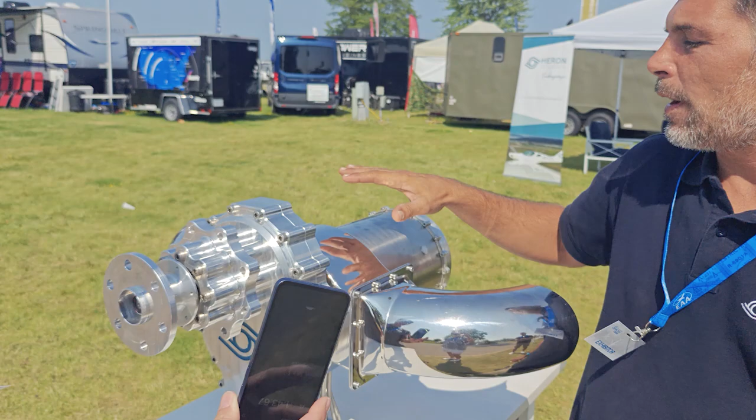So we have a twin fuel system for redundancy. It is vetted and working mostly with Jet A or the heavy fuels like kerosene or diesel, if you will. In the case of the hybridization, because it is a free turbine, it can handle the loads very easily, because the gas generator reacts accordingly to the load. So if you load it with a big load, it can handle it, and you see just some change in temperature.

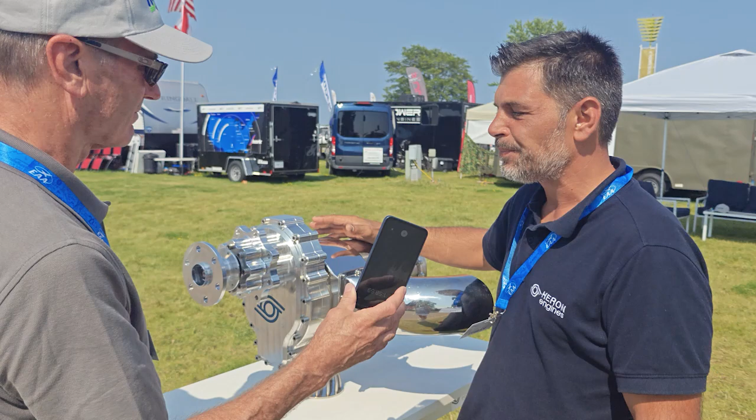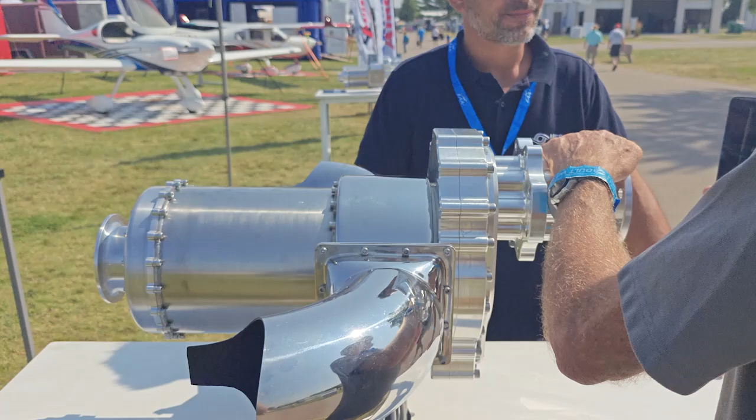The gas generator rotates about 75,000 RPM, and then we have the free turbine and the reduction gearbox here where we have the output shaft. Right, and now we can take this output side and reduce it, which is better for our prop speeds. And with our electric motor mounted with all these mounting points and our cog belt system that goes around the electric motor, tie that into the ECU, where we can then double the power for climbing to altitude with only a small battery, because then we'll turn off the electric motor.

The gas engine is up in cold air, which it really loves, and it's at its peak horsepower then at altitude, and it's recharging. We have a service ceiling of 28,000 feet. Yes, 28,000 feet, and the electric motor doesn't have a service ceiling. It doesn't care, but then it turns off and turns into a generator and recharges that small battery pack, which then provides a stealth mode option at a later time in the flight.

So how many of these are in production now and in testing? At this moment, we have 4 pre-production engines that we are flying with our airplanes, and we are setting up the production at this moment. So that's perfect for our program, because we're both starting out, and this is already not only a working model, but a flying model. So we're in a phase 2. This could be easily installed in one of our test bed aircraft and prove all the parameters. It is a huge benefit.

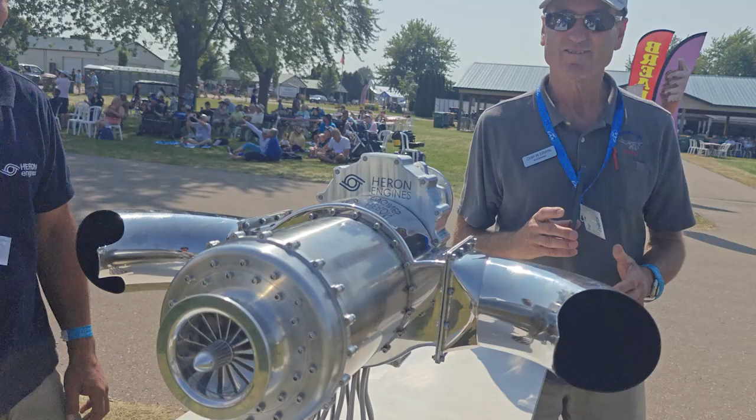Chip Erwin, Aeromarine, at the Hybrid Pavilion, where we're displaying the Redline turbine and some of the other hybrid technology that we're developing under this Phase 1 SBIR, and we're also, parallel with the SBIR, commercializing these and developing these in real time, real working models, and showing it at the biggest air

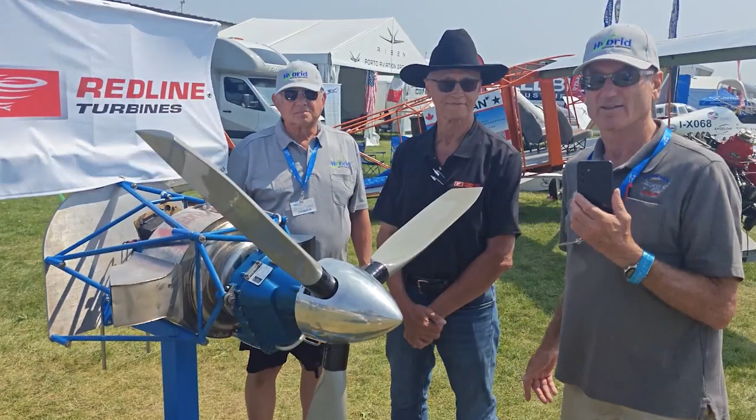show in the world. And we'll show you the whole booth shortly, but let's get right into it with Brian from Redline and Ben Bosma from Aeromarine and Parallel and Hybrid Aerospace, our technology partners. So here we go with the Redline turbine. My name is Brian Seegers. I'm a partner at Redline, and we're here working with Hybrid Aerospace and Aeromarine.

We have a 100 horsepower recuperated free turbine turboprop. We call it a miniature version of the PT6, and it was developed originally for drones. And what we have here is basically the complete engine from prop flange to the inlet. The entire weight of this engine with accessories, perhaps 75 pounds. This one is currently fitted with an electric controllable pitch propeller.

However, one of the reasons we're here on display is we're working with Ben at Hybrid Aerospace and Aeromarine to adapt a perhaps 90 to 100 horsepower hybrid system, similar to what is being tested on the recip engines. Would you like to chime in here?

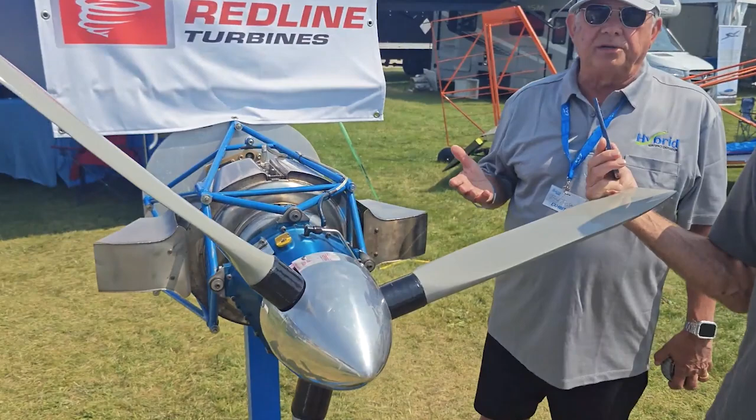Yeah, I'm Ben Bosma from Hybrid Aerospace, and what we're doing here is we're exploiting and finally getting to use several patents that are part of Hybrid Aerospace to develop a parallel hybrid engine, which is unlike anything else here. Typically people will call a hybrid something where they attach a generator to a motor. That's not a true hybrid.

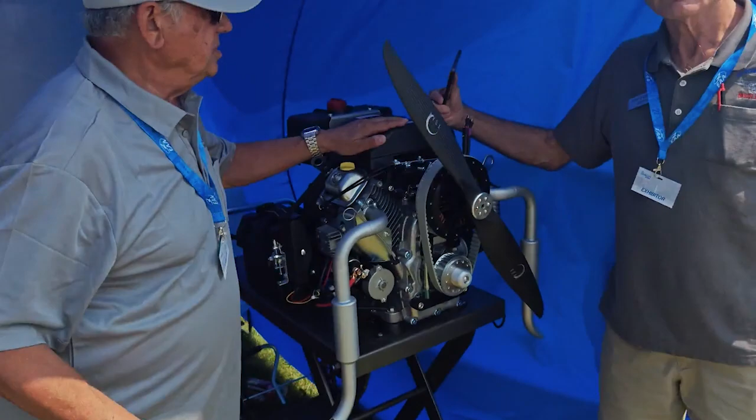So our parallel hybrid technology is identical to what you would see in the automotive industry, the Prius, for example, or the Ford hybrid. I have an example of how that works over here, which would simplify it. So this engine right here is a very easy to purchase Harbor Freight Predator 670cc engine. It produces about 22 horsepower.

And available off the shelf for $950 with a free flashlight. $50 off on Father's Day.

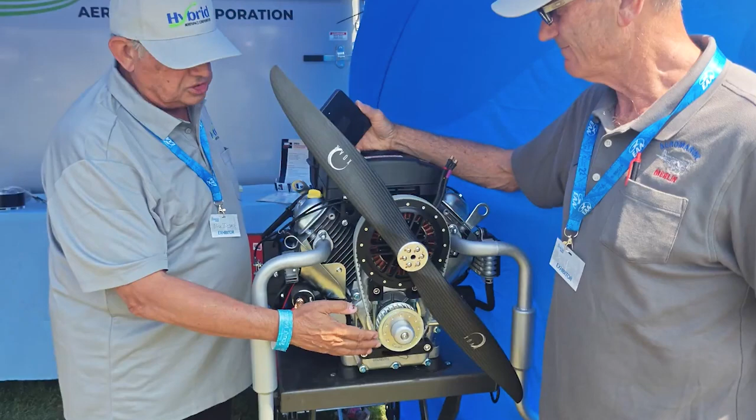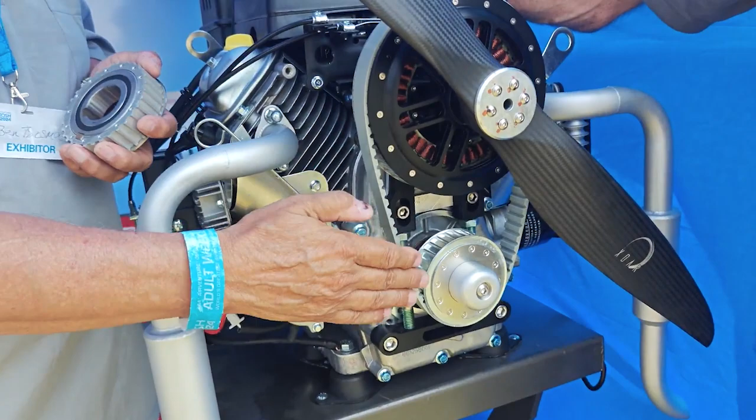That's right. So what's different about it is we have a redrive, which is a reduction drive that reduces the output RPM to a more reasonable RPM for swinging a propeller. I don't have it tightened up right now, but down here is what's called a sprag clutch, sometimes called an overrunning clutch, and I've got one here that I've opened up. What it does is it turns freely in one direction, but it locks in the other. There's no ratcheting, and it fits right here.

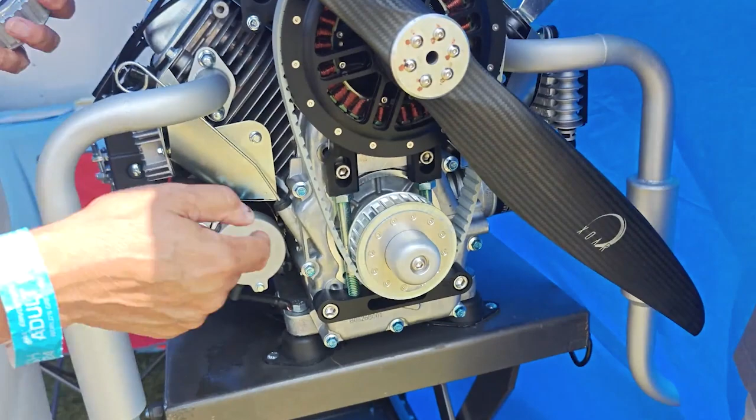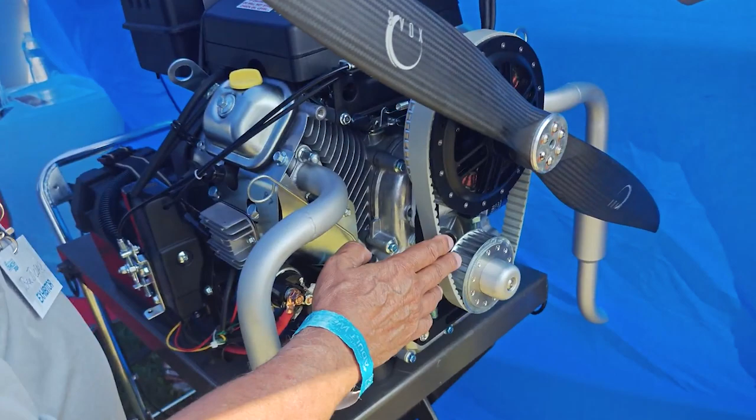So as this engine turns in this direction, it grabs the clutch, but if you go in the other direction, as if I have the power coming from the other side, it freewheels. This allows the motor to power the propeller instead of the engine. However, because of this arrangement, we can actually do both. So if we had to, we could combine the output power of the engine with the output power of the motor to, in this case, double the power of the entire system.

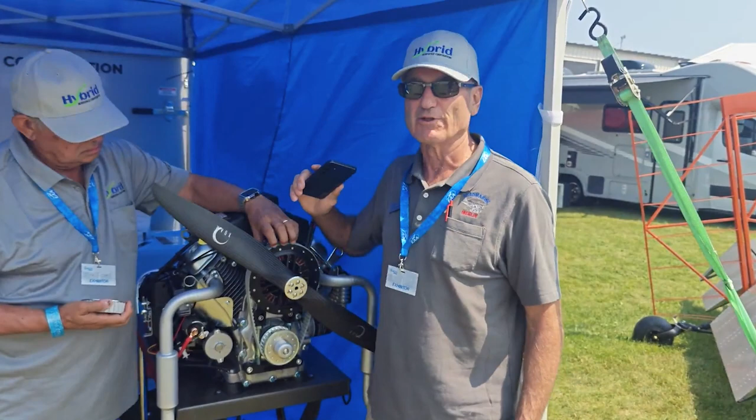We're doing the same thing with the Redline turbine. We will have a motor connected to the output shaft of the turbine, and the two will combine, or the motor will be able to power it separately, or the turbine. Well, Ben, if I may, this is a 3-month Phase 1, which normally is just a feasibility study, but we've actually finished this, and both the motor and the engine have been running.

And when we get back from the show, we will finish the integration of both of them, where we can use this test bed and use a scale to measure the thrust of the electric motor, measure the thrust of the gas motor, and then measure the thrust combined with both of them operating. And then that will be our first truly functional finished parallel hybrid.

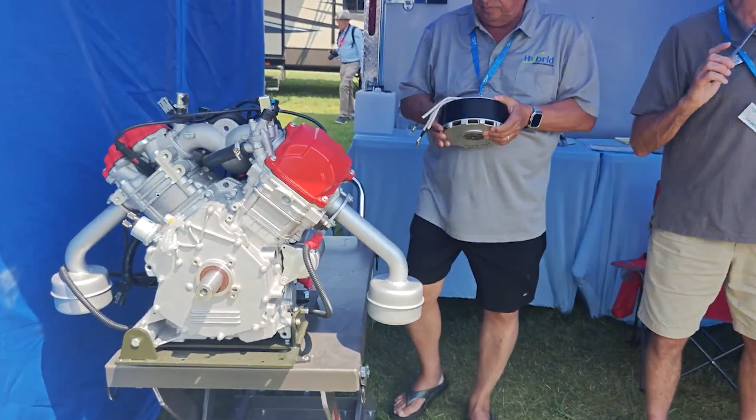But as you can see, moving forward, and you can see a couple other engines here, motors, we can choose nearly any gas engine and match it with equivalent power in kilowatts of the electric motor. And then we just mill these rings that fit on. There's other parts that aren't here, but you get the idea of how that would attach.

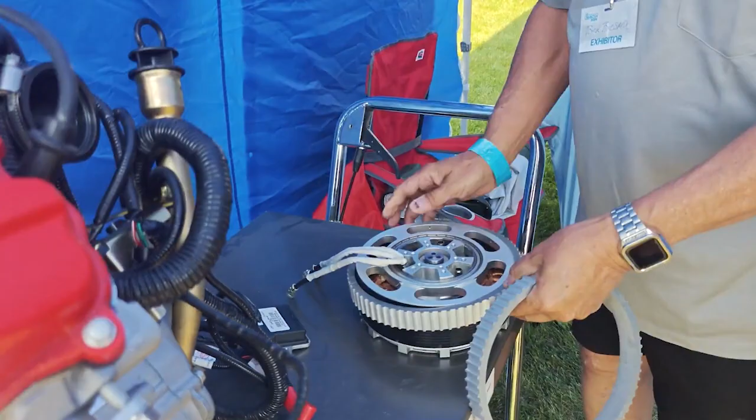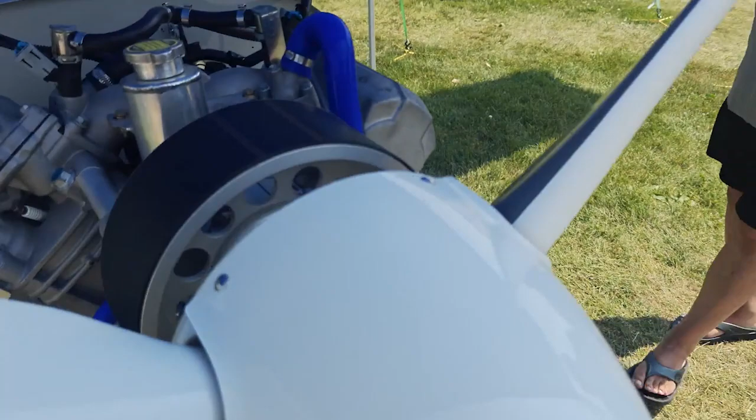So the next size up is the 60 horsepower V-twin, which we use on the Merlin light sport class aircraft, and we have that on display. That's a brand new aircraft, and maybe take a quick shot of that. That's the hybrid Merlin that will be flying first with the normal reduction drive, and then after getting the benchmark data, we will convert that top pulley and remove that and insert the hybrid system, and then fly it on gas, and then fly it also on electric, and then fly it combined.

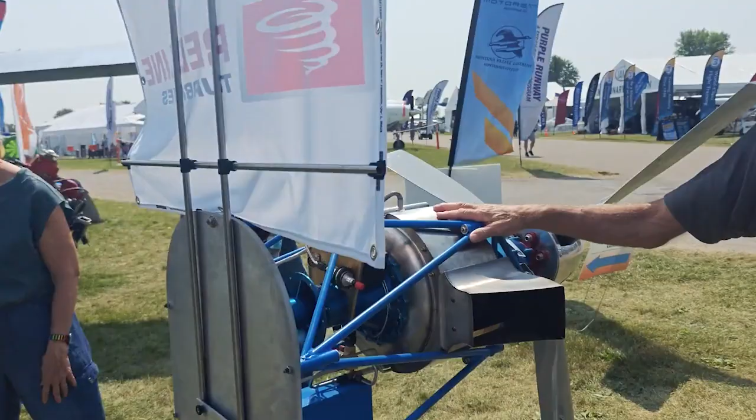But first bench test, and then we have the platform already finished, so we'll be flying the first parallel hybrid this year. Now, the next scaling up is what this can do. And you can see the different size, the different kilowatt motors that can go onto this. So we're circling back now to Brian, where he'll describe how to integrate the electric motor here. Okay.

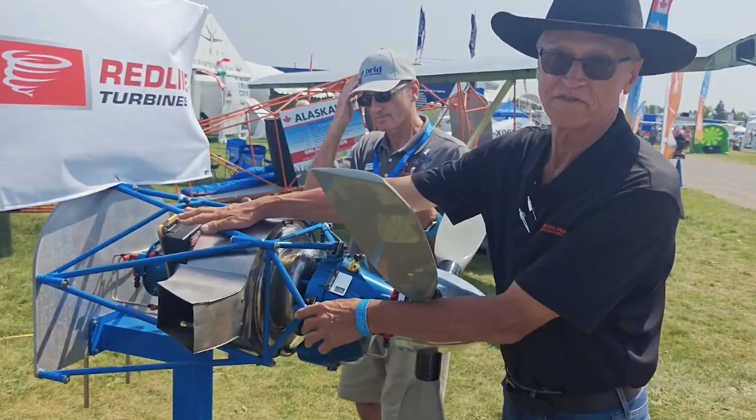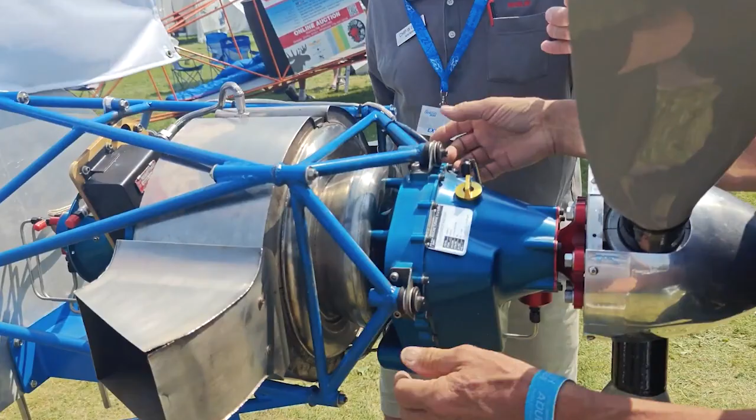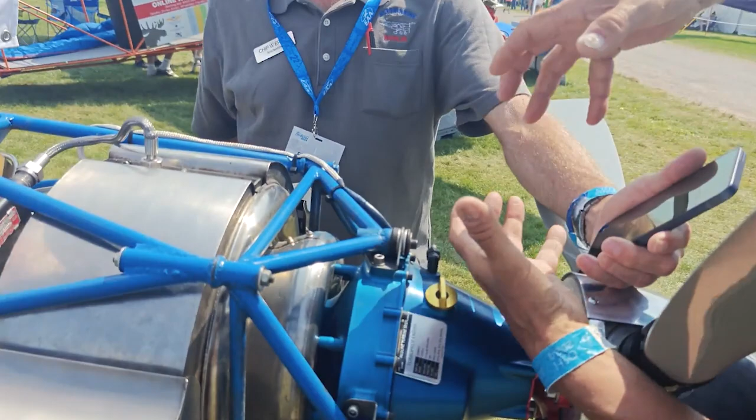This engine mount is divided into two sections. And this one carries the loads past the recuperator heat exchanger. This truss right here can be modified to tie the engine mounts into this structure and then also into a structure that will mount the motor above the gearbox about here. We'll take the isolators off here and put them on the actual mounts that hold the motor gearbox and the propeller, which now has been raised up to here.

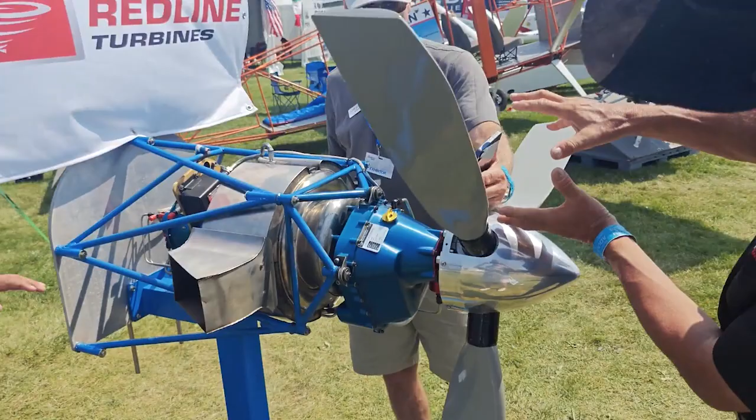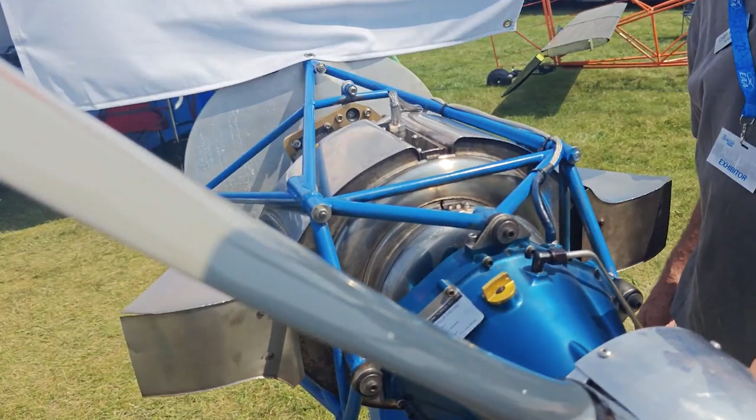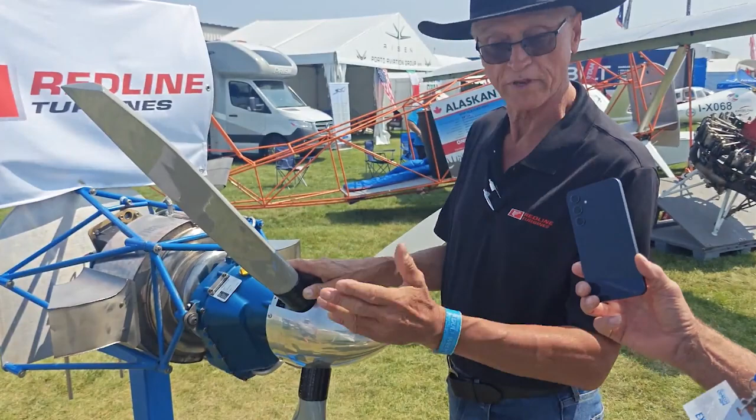Just like with the reciprocating engines, we can operate with the motor engaged, perhaps 180 horsepower for takeoff, and then turn the motor off and use it to charge batteries during cruise. Also, another benefit of having the thrust line moved up with a structure here and a gear, we'll say a reduction drive, we now have an opportunity for a through hole so that we can run a standard hydraulically operated constant speed propeller. So we can basically run a constant speed propeller at a lower speed than this propeller operates at, perhaps in the sweet range, 2300 to 2600 RPM for low noise, and be able to use an off-the-shelf propeller governor and pitch control.

Well, we keep finding further benefits of this. One of them, by moving the power output higher, we gain more ground clearance of the propeller. By gaining more ground clearance, we can put bigger blades on and more blades and longer blades, which is not only more efficient, but we need that, especially the adjustable pitch, to soak up all that horsepower that we're now putting on with two power systems. And another benefit, and maybe you should talk about this, Brian, is that turbines love cold air.

But they're not so great when you have hot air on the ground and you want to get to altitude. And what we're doing, the main premise, or one of them with the parallel hybrid, is we're not carrying thousands of pounds of batteries. We're only carrying a minimum amount of batteries to assist in getting up in the air. But having that extra power to supplement the turbine means that we can get this turbine up to colder air where it can run more efficiently, and that'll be a major benefit in range extension. Yes. Was that clear enough?

That was clear, and maybe an additional benefit you might want to mention is that batteries don't care about density altitude. Perhaps there is degradation in propeller performance, but we do not have the degradation in, we'll call it engine performance, because electricity doesn't care what altitude it's at. So you'll have the full power available from the electric motor, whether you're flying sea level or out of Denver, Colorado.

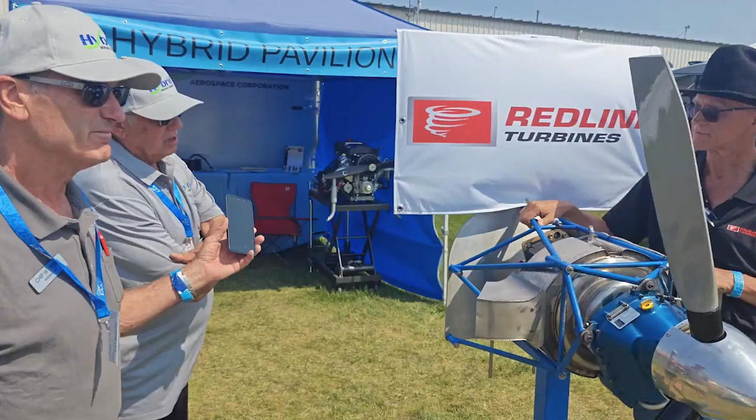What is the specific fuel consumption of this engine, and how does that compare to a reciprocating engine or other gas turbine engines, Brian? I'll start by saying small turbines are typically less efficient than piston engines. Now, this engine is different from many of the other turbines you see. It incorporates a heat exchanger here that takes heat from the exhaust and returns it to the air downstream of the compressor. And this thing is responsible for 15 or more % reduction in fuel flow.

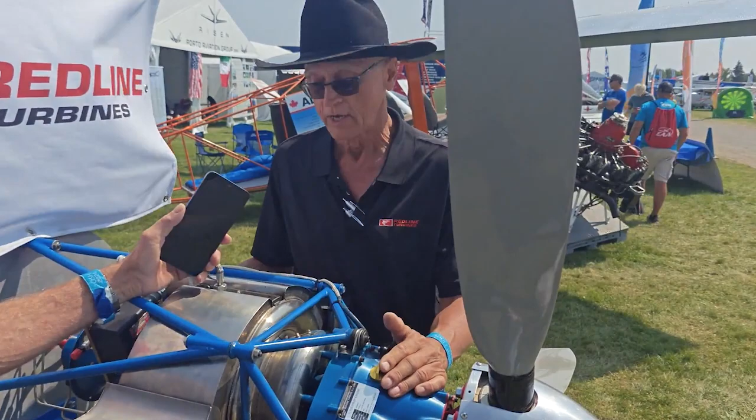Yes, and I'll even throw in another benefit. When you parallel hybrid something like this, you're giving yourself the extra power that you need to take off out of a short strip or some crazy runway someplace. When you get up to cruise, you're cruising now with a smaller gas turbine than you normally would have needed if you had to have that power solely from the turbine. So you're going to be running a smaller gas turbine at a higher power level, and when a gas turbine runs at a higher power level, it gets better fuel efficiency.

I'd like to continue a quick tour because on these programs, commercialization is quite a big factor. And I'd like to point out that we've been at this show here now 44 years, and we're in the center, air show center, prime real estate in the general aviation section, and we've got basically the equivalent of 3 booths. So we're just gonna walk down here and have a quick panoramic of, we've got this hybrid Merlin.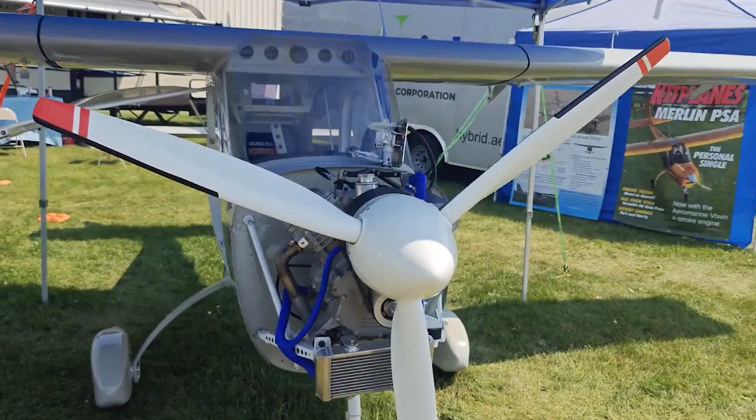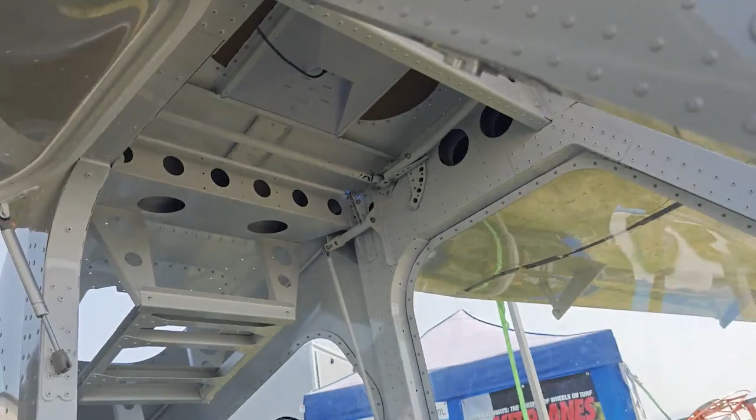And I need to point out something special about this. It'll be ready to fly in just about 2 weeks, but it's the first Starlink enabled light aircraft. And we've 3D printed a mount, and you can see that on the top, or you can see it from the bottom. I'm not sure, can you see that? So this is an active Wi-Fi now. It's really a truly mobile hotspot, and we've been using it all week for our phones and tablets.

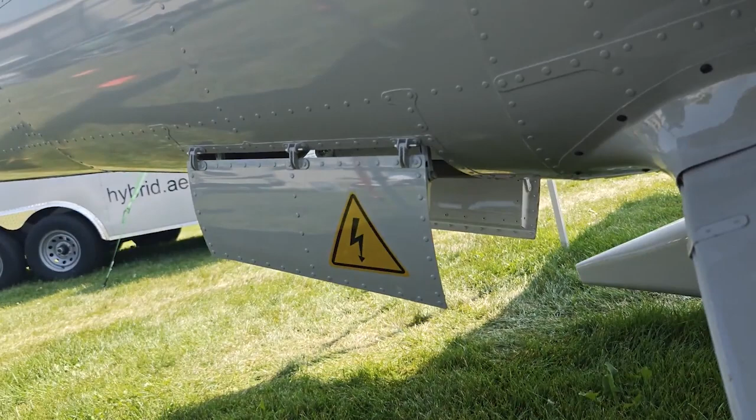But we have another feature on this aircraft, because this will be hybrid, and if you show this, which everybody refers to as bomb bay doors, because that's kind of what they are, that allows us to load and unload the battery packs. Remember, hybrid is only using the battery a little bit, like 5-10 minutes. So we're not carrying hundreds of pounds, we're carrying like 20-30 pounds, easy to load, easy to unload, and in case there's an incident, easy to eject. So we can offload the batteries should there be a catastrophic failure of the batteries and they're gone.

There's another benefit that maybe you might mention there, Ben, of what else we can load in there? Yeah, if we had to load supplies or some sort of a kinetic effect payload, we could do that easily using this system. Another thing about this particular aircraft is that it's set up to be a drone. By that I mean it can fly autonomously. It has all of the servos and all of the electronics to be able to fly on its own.

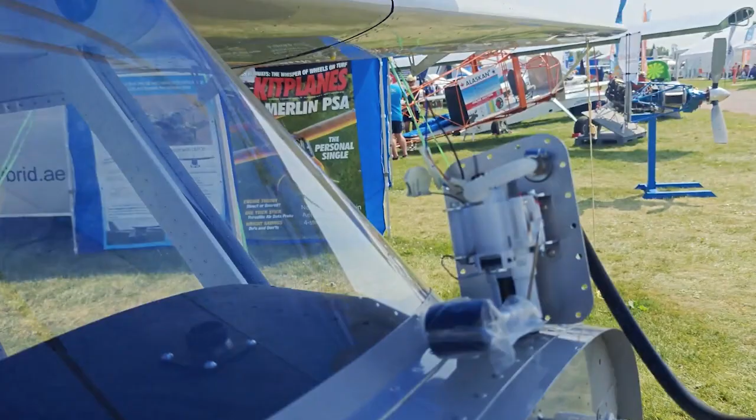One of the key features that we designed into this aircraft is the fuel system. In most light aircraft, the fuel is distributed in more than one tank. So with this one we're no exception. We have tanks in either wing, but the way that we manage the fuel is through an all-automatic fuel system that allows us to draw fuel either from the left, right, both, but in addition to that, we can take the fuel and deliver it on a timer or a balance system.

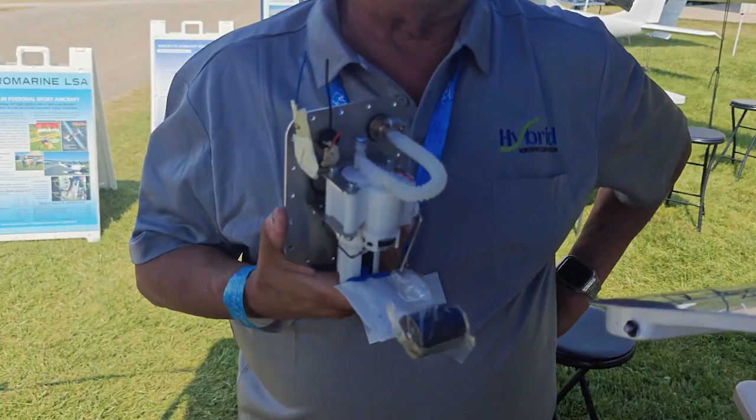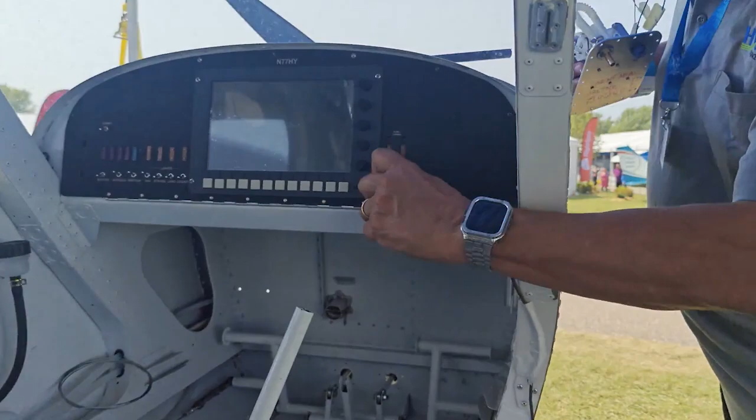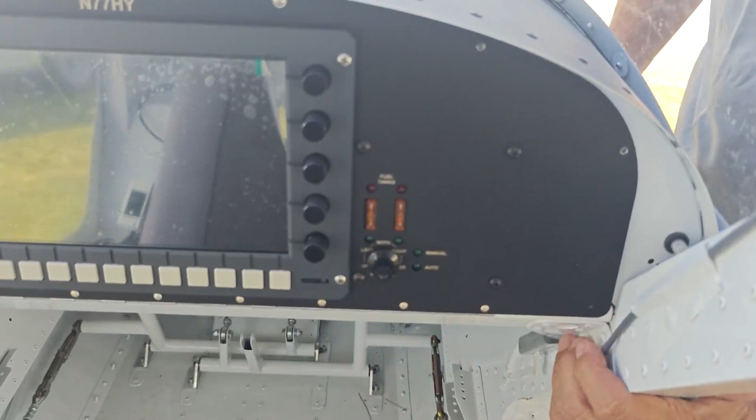If you look in the cockpit here, let me get in the way here. We have a fuel management system that in this position is in the off position. Then we have left, right, both, and then we have timer, which means that the fuel will go between tanks left and right every 5 minutes, and balance. That system there is on a PIC type of controller, all burned into hardware to allow this to function. The lights tell us which tank is feeding, and these two lights tell us whether we're in manual mode or automatic mode.

This entire cockpit, when manned, is a full electronic flight instrument system. It has synthetic vision. All of the radios, all of the navigation radios, GPS included, are there. Now, another feature of this is that because we have Wi-Fi streaming in and out, we can access this aircraft remotely using VPN. In other words, we can take this screen and bring it to our ground control station, not with a separate ground control station, but with a browser. So we'll be able to make a Zoom call to this particular aircraft and fly it that way.

VPN is actually the way we're going to do it, but that means that this thing has a dedicated IP address which we can access. And I'm thinking that this may be the first and only aircraft that will be able to be managed, controlled, and flown using Starlink.

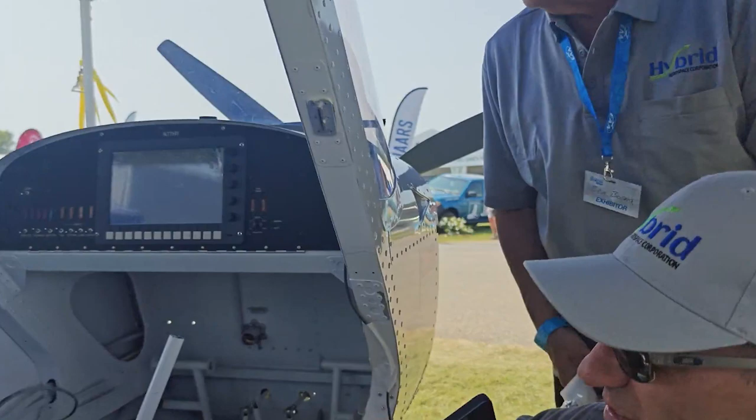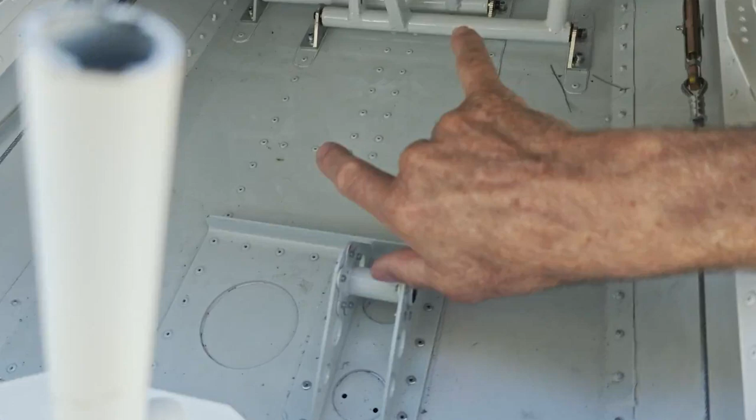Right, and that benefit in GPS denied theater. I'd like to mention, if you show here, we've already installed or prepared the mounts on 7 different servos. So this servo here, and I'll show you the servo if you bring the servo over, is the steering, because it's a steerable nose wheel. So not only does it steer the nose wheel on the ground, but it has the rudder for one axis

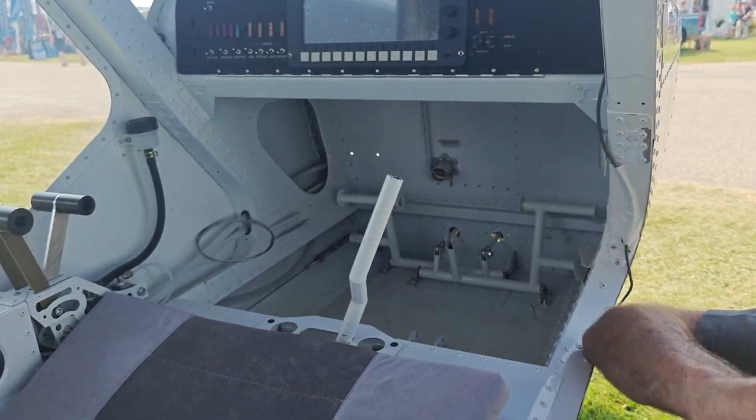of the flight. Now in the back, you won't be able to see them, but there's 2 conventional servos for pitch and roll that are normal for a 2-axis autopilot. And then we have a brake servo and a throttle servo. The throttle servo might be simplified with this electronic throttle, because this has a mechanical switch on the fuel board, but it's a microprocessor behind, so that can easily be controlled simply with a signal.

And then there's another servo for the flap. So we have a 0 to 40 degrees with a 5-position flap up there. And this aircraft has a rocket propelled parachute. So we have a parachute that will bring the whole craft down. It opens up in under 3 seconds and floats the whole craft down. And there's a servo to enable the parachute.

And of course, then there's the bomb bay doors, which can deliver humanitarian aid, blood canisters, type-specific blood, drop off batteries, drop off other payloads, or kinetic devices. And that's on a servo as well to open and close those doors.

Now there's a variation that we have in design, because it's quite simple to increase our range because the fuel tanks are in the wing. We can triple the amount of fuel and simply add a fuel pump in each tank, and it's just simply a matter of selecting which fuel pump to turn on, and that's all you have to do for fuel management. It's very simplified, and we can do 4 times the range, and we already have 500 miles range on this.

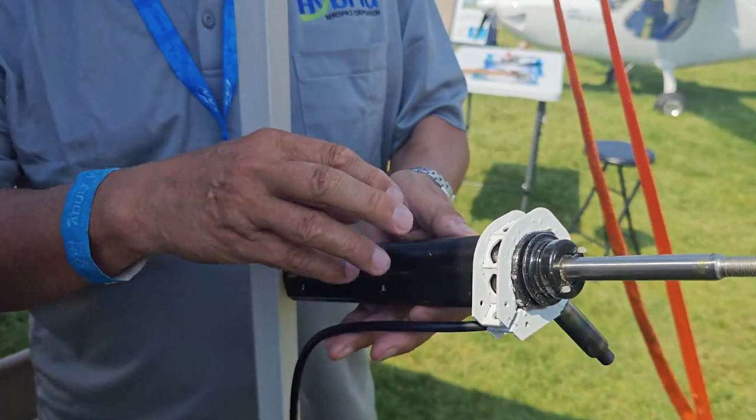I'd like to talk a little bit about the type of servo that we're using. So in a lot of aircraft that are both optionally piloted and autonomous, the servos are difficult to disconnect. So in a lot of cases, that's a problem. This particular servo is a linear actuator, but as you can see, the actual actuator free floats. The reason it free floats is because there's a split nut on the inside that grips the Acme screw to actuate it. So when we energize this servo, that's when it becomes a servo. Otherwise, it's just free floating.

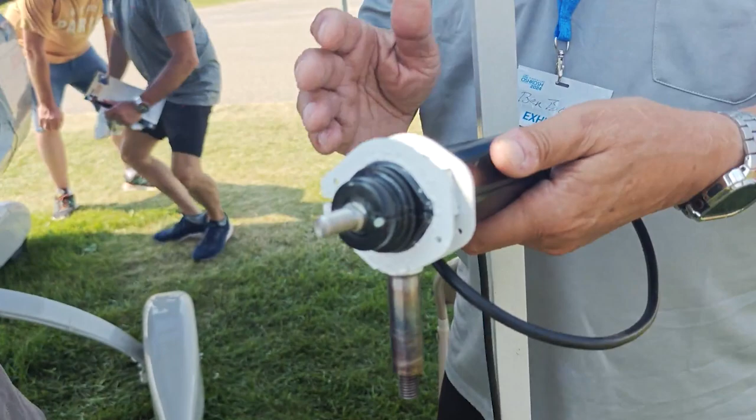It also has what's called an LVDT in here, linear variable differential transformer, to give us the position. In this case, we're using this one for the rudder and for the nose wheel steering. We will know where the nose wheel steering is, whether a pilot is actuating the nose wheel steering or whether the software is.

So there's also an electric trim tab on here, but basically the key point of what Ben was saying was when there's a pilot on board, all axes are free. The pilot can control the aircraft. There's no friction or insignificant friction on all the servos, and that's a pretty big deal because anything above 55 pounds is very difficult to fly.

So test flying this type of UAS is very simplified with a person in it, just monitoring. He doesn't have to fly it. Someone on the ground can be flying it, or autonomous, completely remote, even beyond line of sight. But the pilot is in there, so it is perfectly legal in most airspace in the United States, and he can take over the controls if he needs to.

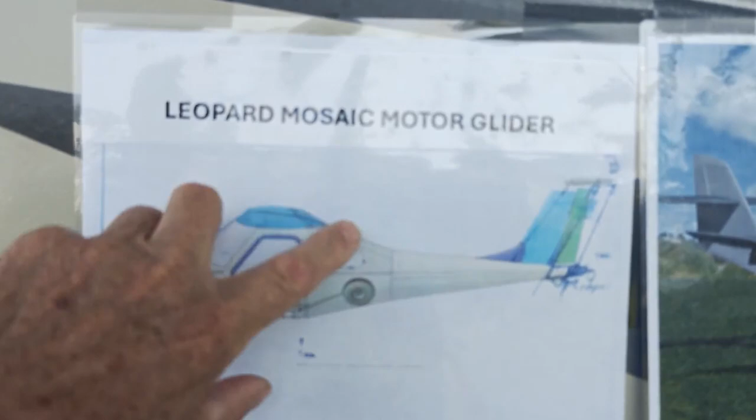I'd like to put a plug in for what we think is our optimum UAS, and that would be this airplane, which is the Leopard, which stands for long endurance, because we can put all that fuel in there, an 1,800 mile range. Optionally piloted because you can put a person in there, or it easily carries 300 pounds, so there's a huge payload. Attritable because these are low cost and they can go one way.

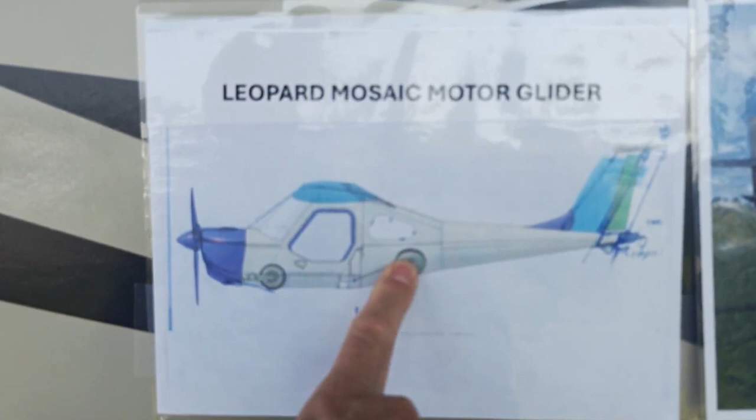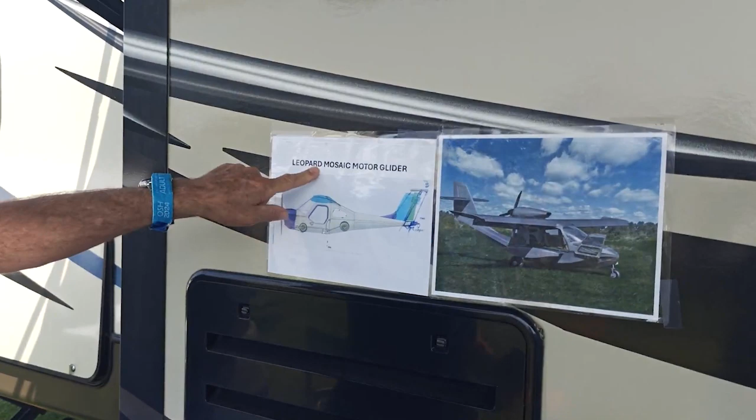We don't care if they come back, and if it's shot down with a $1 million missile, that's a win for us. We can send 20 of these out and they shoot down 10. That's $10 million of missiles that the opposition no longer has. And then reconnaissance, because you can have sensors on here. We have also a retractable gimbal, and other various sensors are available, and drone.

So the Leopard also has a very large commercial market because the private pilots moving down from their more complicated Bonanzas and Cessnas, because they're getting old and they're expensive to fly and expensive to maintain, can buy an aircraft like this on the retail market for about $75,000. They can go 150 miles an hour, they can have retracts, they can have an adjustable prop, and they can have an affordable aircraft. So we're looking forward to a large military and commercial market with that.

And we're the experts in that. We've been doing this for decades and built over 1,000 aircraft. So these are right in our wheelhouse on what to make. And then we just have to up the game here by incorporating that hybrid engine in it. So we can take off with more weight and more fuel because we have that extra electric power, and then we're more efficient at altitude.

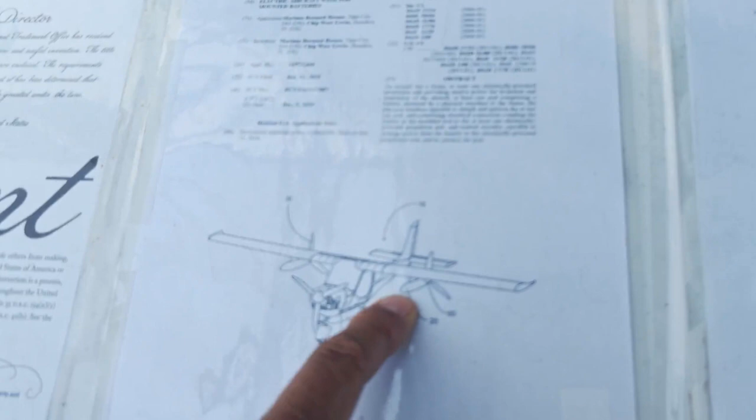I'd like to talk a little bit about the patent portfolio that's part of the hybrid aerospace. So we have a total of 7 patents that have been issued. We do have several that are pending, but we don't really talk about the patents that are pending because that's not IP that we own. But we do have the patent for an electric hybrid type of design that includes battery pods that have powered propellers on them and can be jettisoned.

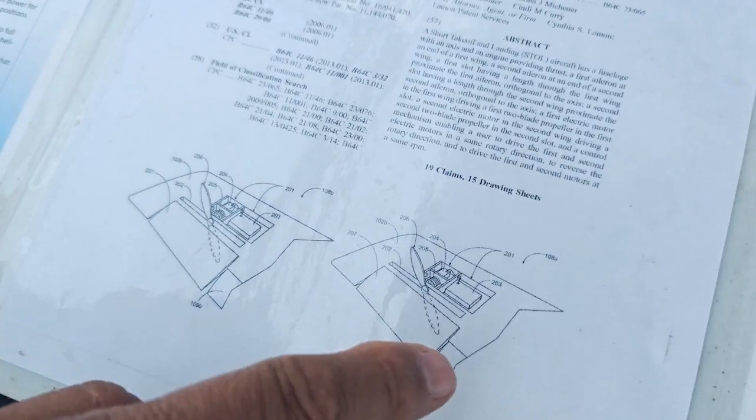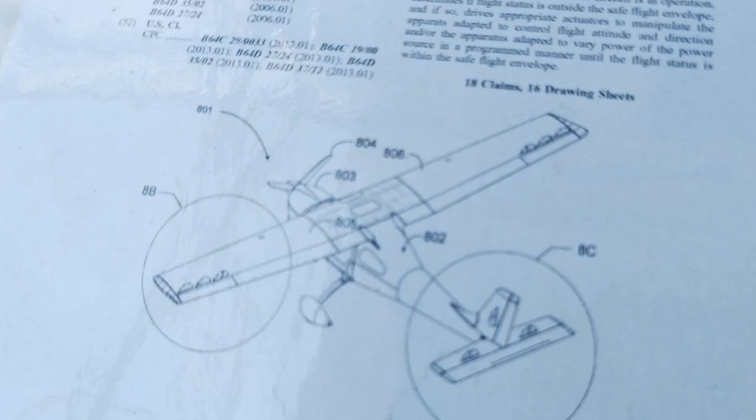We have that patent. We have, of course, 2 patents for a parallel hybrid aircraft engine. We have patents for propellers that are near the ailerons on either side to de-spin an aircraft in the event of a loss of control. We also have patents for propellers distributed all over an aircraft to control it in the event of a slow flight incident, and then particularly for the situations that I just described where there's a potential loss of control.

And that's kind of how Aeromarine operates. It's not just a company with, in this case here, just patents, but there's actual hardware. There's customers purchasing aircraft, engines, and technology from us, and therefore there's a lot more going on here than meets the eye. Right. Well, just a quick glance at these slides, because we're very close now.

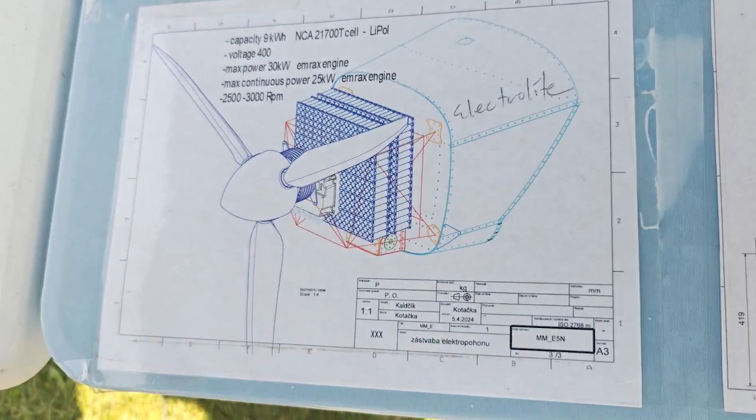We have designed the electric propulsion system. It's not a hybrid, it's pure electric, and electric actually works very well on a very clean and low energy aircraft like an ultralight aircraft or a motor glider. And we happen to have an ultralight and motor glider aircraft in our portfolio. We're building the airframe now to be flying this year, and we already have orders for this. And the brand name is Electrolite, and that'll fly 1 hour on electric. And I'll show you that.

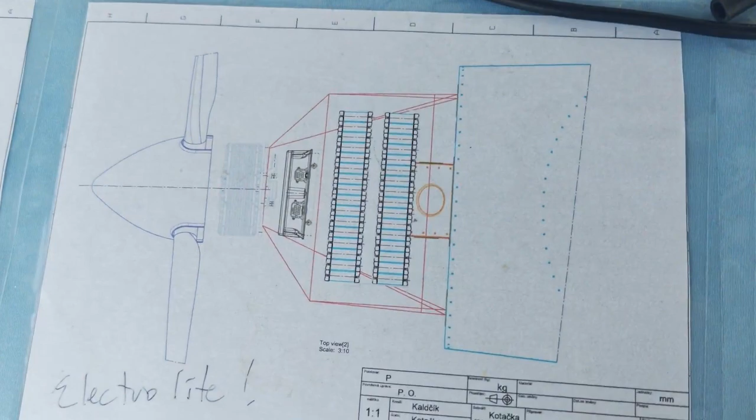If you look at this airplane here, on the left is the motor glider wing, and that is the Electrolite. This one is gas powered, but it'll be gas and electric, so customers can choose 1 hour of endurance and nice, clean, quiet, safe electric flight, or conventional 2-stroke gas engine and 3 hours of flying. But the mission of many of these pilots is they just want to get up and fly for an hour, dawn patrol, evening flight, or get up and soar with that long wing.

We didn't have room in our booth to put the ultralight in with the short wing, so we simply just put the wing on this aircraft because they're interchangeable. You can convert this airplane in a half hour to an ultralight with a short wing or a motor glider with a long wing.

And it gets even better because for decades we've been selling these floats. And these floats are ultralight floats. You can pick it up with 2 fingers. It's a 30-pound float, and you put 2 of these on this aircraft or a new ultralight that we're introducing this year, because float flying expands the universe, expands our flying.

And real quickly, this is a pure ultralight, which means it's a Part 103, no license, no medical, and a folding wing, which folds in about 4 minutes. So this airplane can be towed on a trailer, and you don't need an expensive hangar, and it's easily deployable. It's more of a recreational vehicle, but it saves a lot of hangar space and a lot of expense.